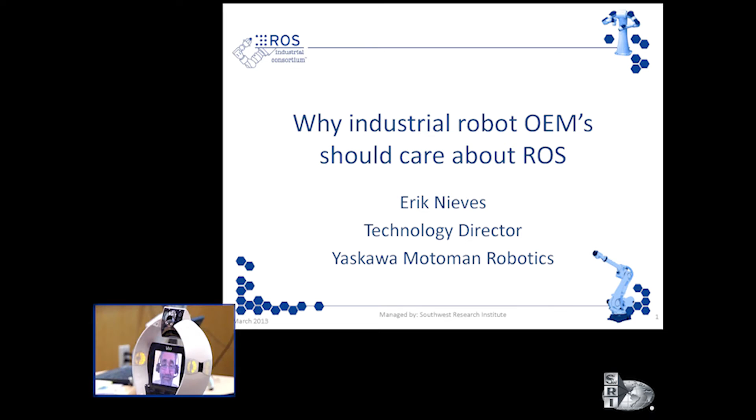Well, gentlemen, thanks for indulging my presentation in this manner. I'm in the piney forests of northern Guatemala as we speak, working on some mission work digging wells, but I didn't want to miss the opportunity to address this group because I think the ROS-Industrial effort is important.

By way of caveat, I can tell you that this presentation is an update of one that I gave at Fraunhofer late last year, and I've since been asked to present it again at ROSCON later this spring. So, Uli, you're going to be tired of seeing this by the time we're done, but nonetheless, it's entitled Why Industrial Robot OEMs Should Care About ROS, but, you know, it may have better been named Why Industrial Robot OEMs Should Care About ROS and Yet Still Don't. So, you know, but that's their issue, not mine.

As I look at 2013, we just finished our 2012 fiscal year last week. We are a March 1 fiscal year, and 2012 was a record-breaking year for us. It was a very strong year, and 2013 looks to be strong as well.

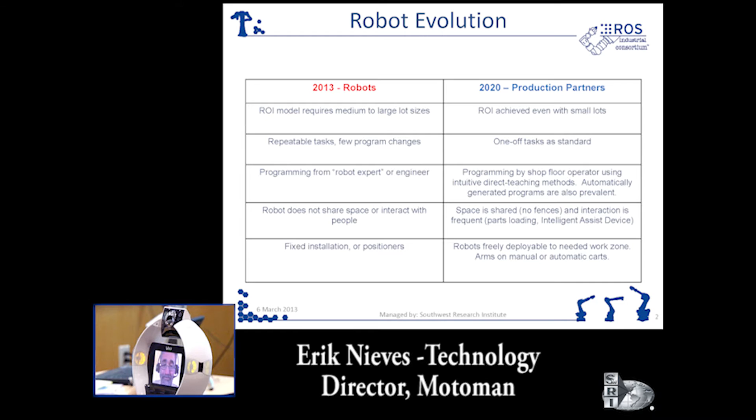So you want to get the next slide for me? Yeah, so in 2013, I was able to service the market with this robot, effectively your 6-axis machine, and we sold them in quantities for all sorts of applications, right? But as I look to 2020, and we want to grow the market, right? I need to do that because if you'll notice in 2013, I have robots above in red. And that's because even though it was a good year for us, it was a good year for all of us in the robot industry. This is a mature market.

So the growth rates aren't what they're going, what we wish they were. As good as they are, we know that it's a competitive landscape. So as I look to 2020, and you want to back up a slide here a minute? Thank you. So I want to move towards these characteristics for applications, right? I want an ROI that's a smaller lot size, that can be afforded with a smaller lot size. I want it to be that one-off tasks are standard.

Why do I say that? What is it that I want? It's not about what I want.

As I look at the business and where we need to go for growth, it was actually a pretty straightforward exercise. All we did at Yaskawa was go back through and look at all the RFQs that we no bid. We looked at all the jobs we turned down over the last 4 years and said, why is it that we didn't take this job? Or that anybody took this job?

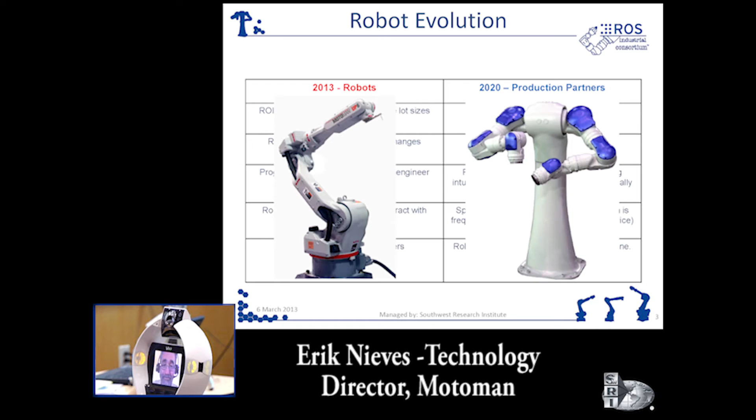And I can't deliver. I can't. I understand the requirements. I understand that you want to be able to have the robot service the work wherever the work happens to be in your plant. I understand that you want it to be very easy to program, that if it could, it would program itself. I get it. I just don't have the tools to deliver it. So what am I going to do?

Right? Well, after we went through this exercise and saw all this business of people that had purchase orders they would be willing to give if somebody could service their needs, that's when I went on my fishing expedition. Next slide.

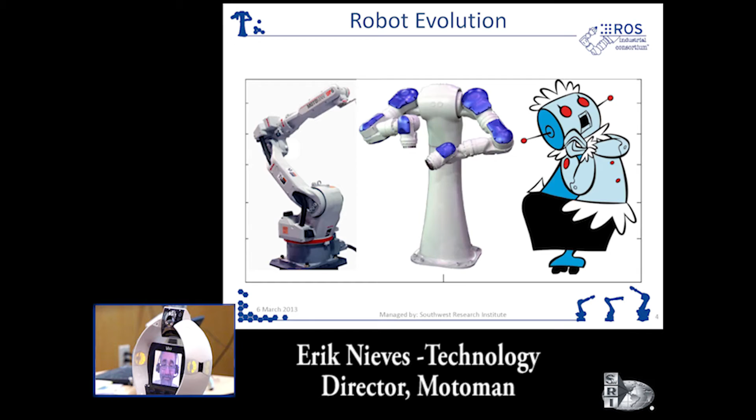So Mama didn't raise no fool. I figured if these are the institutions that are going to be developing the next generation of technologies for automation and robotics, I ought to make it easy for them to adapt those technologies to my equipment. So we partnered with SwRI and generated our first rudimentary interface to one of our robot controllers. We based it on this 7 degree of freedom machine just because people like it, it's researchy. And then we've since ported it over to 6 degree of freedom arms as well. The idea was to have a bridge between the ROS tools and our standard robot controller. Next.

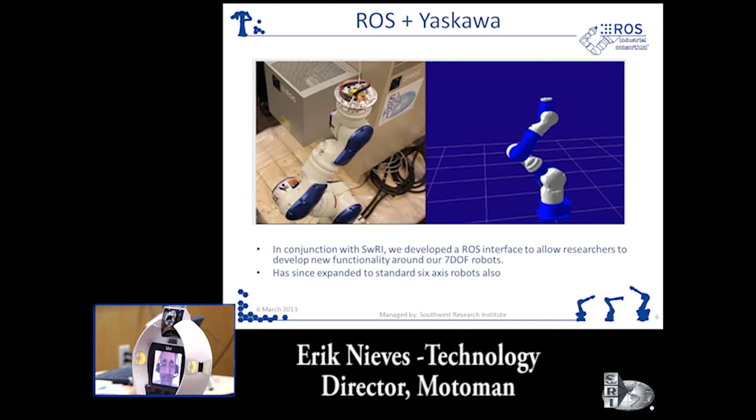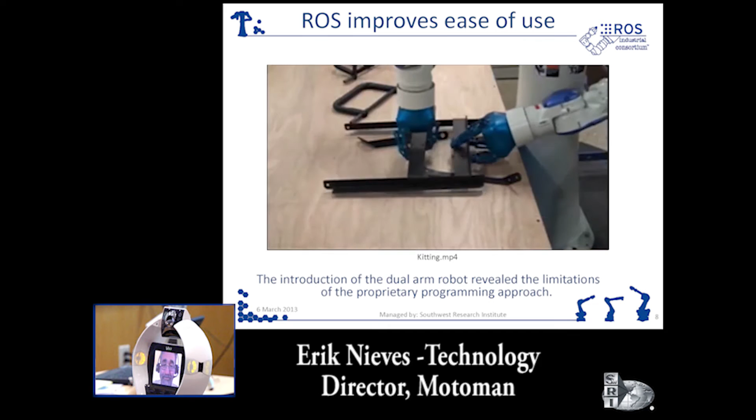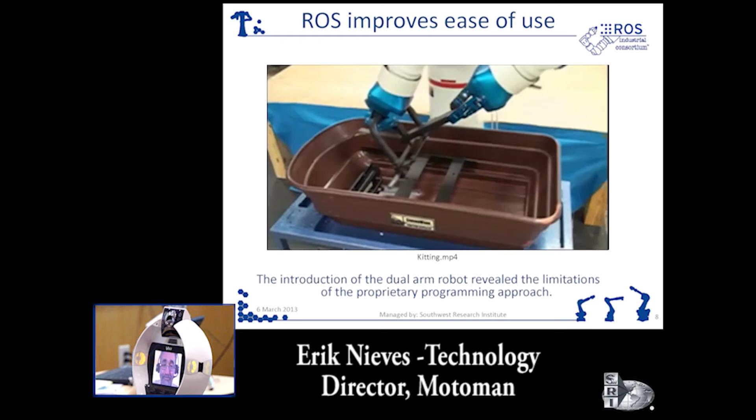Okay, so here's another example of material handling. Same robot, same programming interface, same language, but now I have to do everything, or largely, coordinated between these two arms. So I'll have some independent motions where I'll drop them, but then here, for instance, I'm having to work in a collaborative fashion, arm to arm. There's a lot of motion planning having to happen here, picking components, etc.

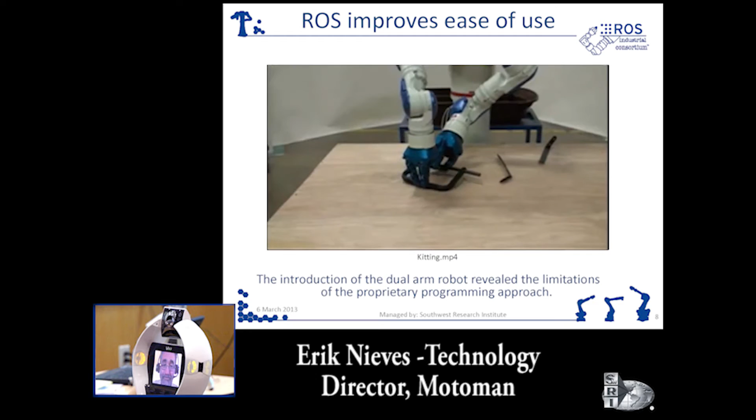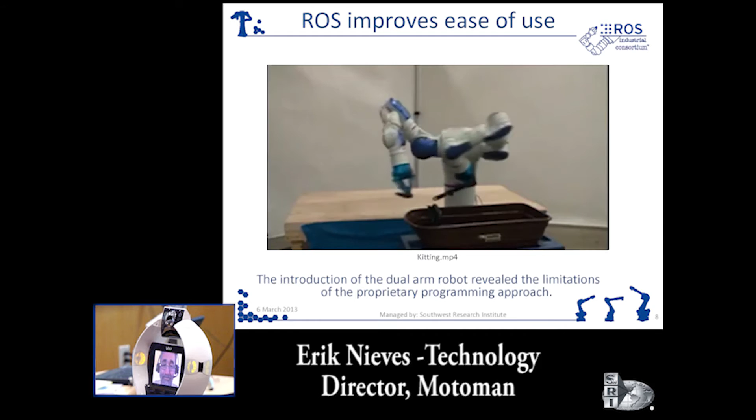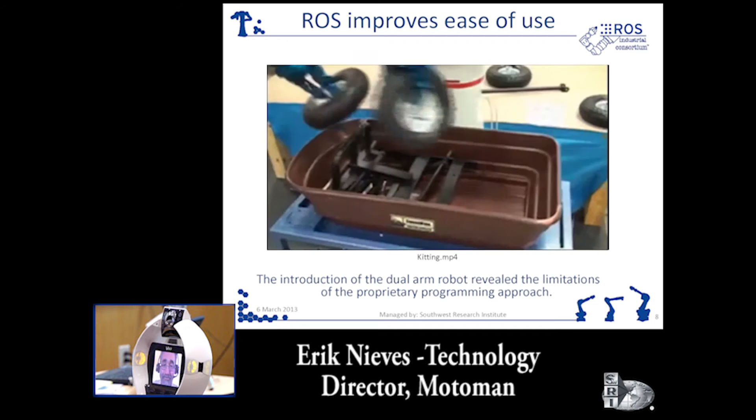We were able to create this robotic kitting demo for one of our users with our INFORM language and our teach pendant approach. We did it, but man, it was a pain in the neck. It was cumbersome to do this kind of work with a standard programming interface, especially like this.

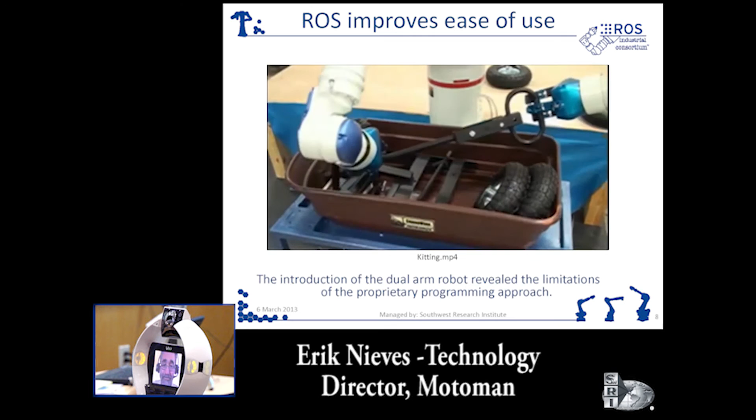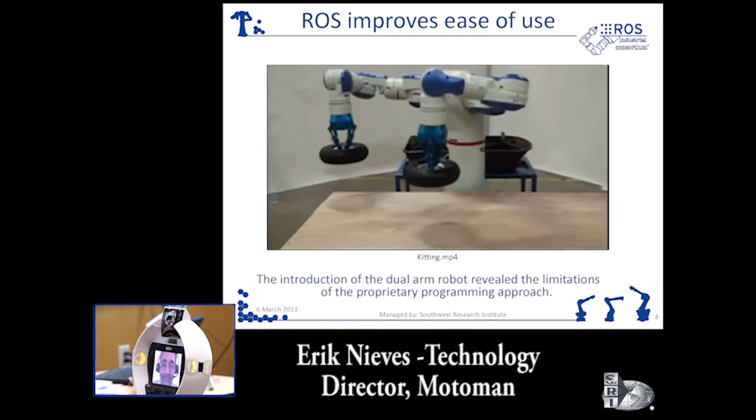It looks slick and it worked well, but it belies the effort required to generate this program. This was not easy to do. And mind you, it was blind, okay? We staged all these parts. If I would have had to add in a whole layer for machine vision with all of those components as well, this demo wouldn't have ever happened, okay?

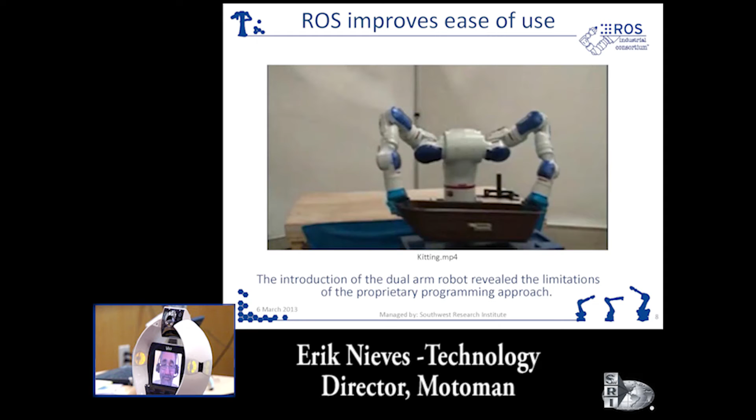It's clear to me that, and maybe this is why Yaskawa is on the ROS bandwagon before some of my colleagues, because these exercises demonstrated to me the need for new programming, and ROS provided them for me, improving the ease of use. So it has tools for whole body control where I can keep one hand still, maintain the pose, and still drive the other arm, including the waist axis, to do coordinated motion elsewhere. Whole body control is difficult. The collision avoidance tools that ROS offers - these were some of the things that drew us to the ROS environment.

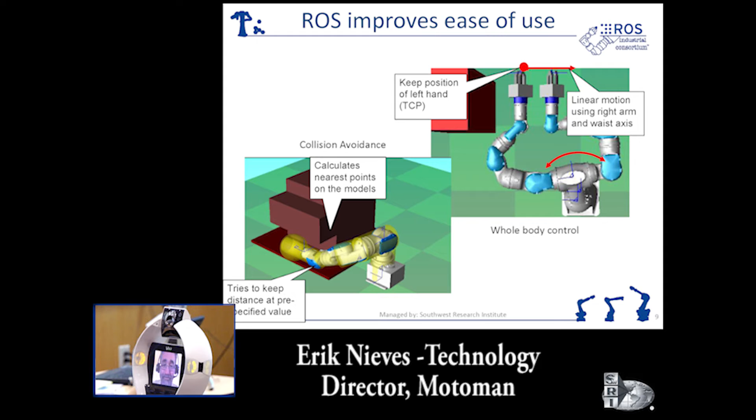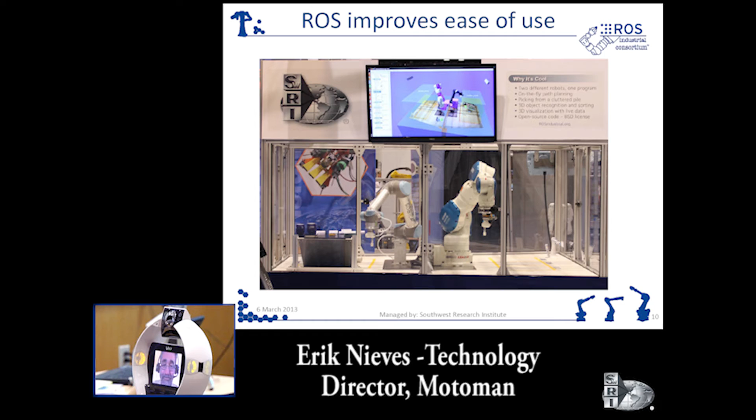Okay, so, OEM criticisms about ROS. This is what I hear when I talk about ROS with my colleagues. I already know how to do IK. I don't need ROS. I already have the expertise, right? It's not invented here syndrome. Well, what this really belies, what this really demonstrates, is a lack of understanding of what ROS is offering.

When I talk to some of my other technology people at my competitors, what I hear is all about kinematics. We already know how to do our kinematics. Yes, I get that. We're never going to use ROS for IK. We can do that. It's all of the things outside of IK that ROS is going to help us with. So when they say they already know how to do it, either they don't understand what they're saying, or I don't know what they're talking about.

ROS adds little value to process robots. This is in fact true. When we talk about process robots, we're talking about spot and arc welding and the like. And these applications make up the volume of industrial robot sales. To a large extent, ROS has no tools for making a spot weld any better, or making an arc weld for John Deere any more robust or stronger.